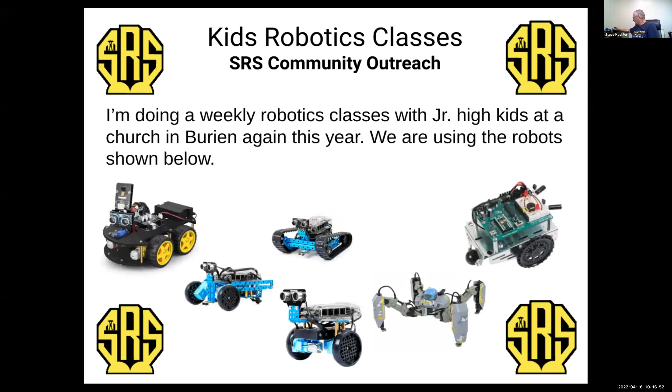I am still in the middle of doing robotics classes with some junior high kids, and currently using, well, I've actually used all of these robots on screen here, but I'm currently using the 3 blue ones in the middle, which are 3 configurations of the same kit. So I actually have, that's what these guys back here are. I'll show those off a little bit later.

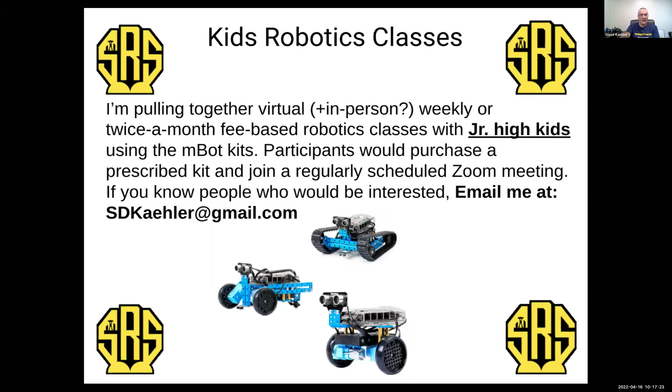I'm still working on it. I've purchased StephenKaehler.com, so I'm creating my own website where I'm planning to have online classes for junior high kids, or kids in that age bracket, doing some sort of robotics thing, possibly using these kits or maybe something else. There's some definite advantages to these, so I'm hoping to share that with you later.

Drive Electric Earth Day is this month, and it's basically filled with events. Most of them are in other parts of the country, but there's an event happening next weekend up in Mill Creek, and another event down in Olympia the last Saturday of the month. I'll be gone for the one next week, but I'm planning to be down at the one in Olympia with my Nissan Leaf.

First Washington events. First Washington is in full swing right now, so there are competitions happening, with some of the preliminary elimination rounds as the kids work towards the finals. You can visit the SRS website, click on First Washington up at the top, and find out about that. Encourage support for that.

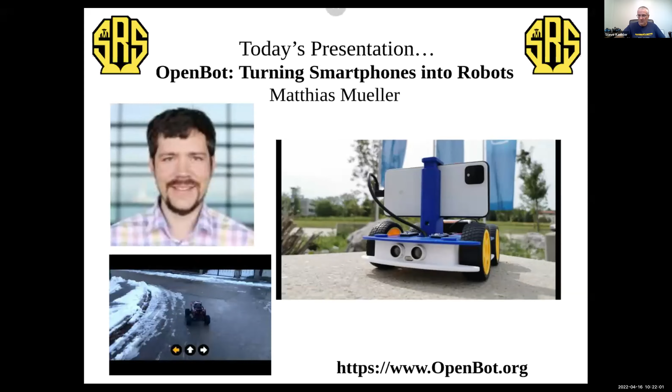Let's see, I should have checked while I was just looking there to see if Donna is here. I know Lloyd is not here today.

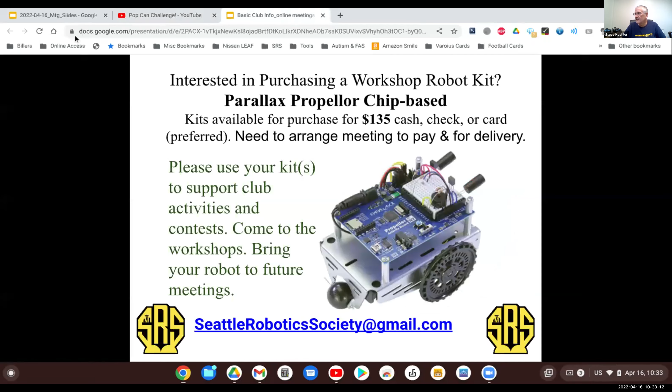Let's see, whoops, get to the right slide deck. So anyway, sorry about that. I had to show that because it was like a promo for the pop can challenge here.

How you doing there, Greg? You close? Just a second, okay, talk amongst yourselves. All right, let's see here, if I can, what I'm hoping... find the speaker. Let's see, select a speaker. Leave computer audio. Oh let's see, what, I'm gonna just check something here quick. Oh that, oh okay, that's all that is. All right, really, what the heck? All right, let me see here, try another one here.

Come on. All right, let me see here. Is anybody, let's see, are you hearing anything from that? No? It's not making any noise on my end either. That's kind of interesting, I wonder what the...

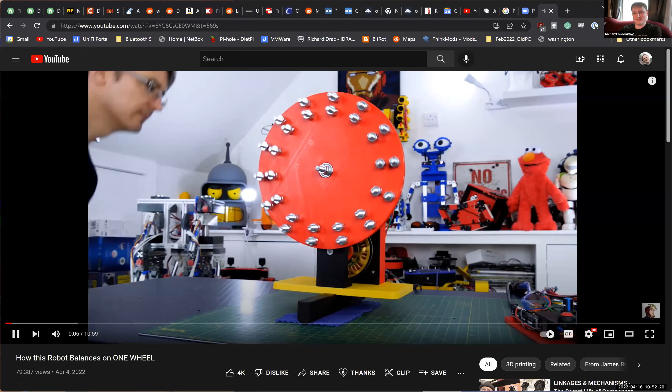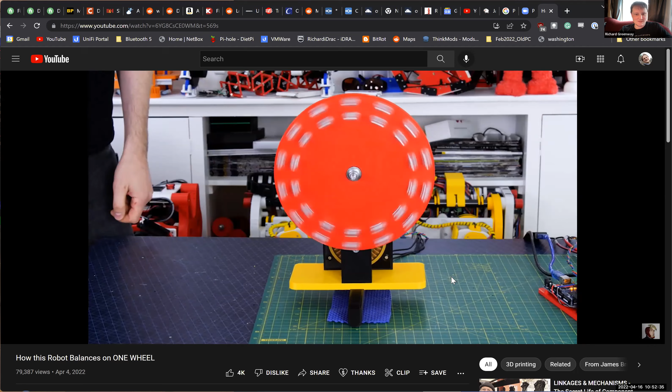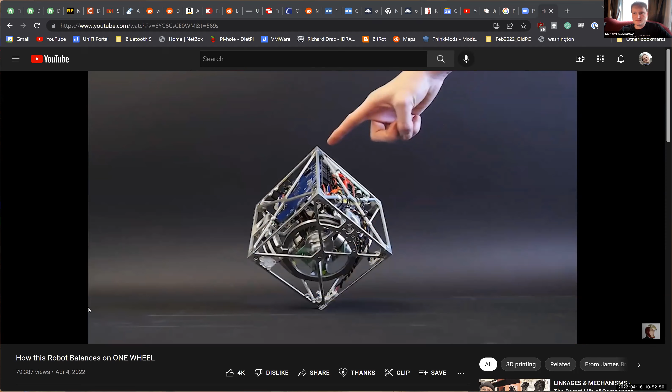Let's see if I... I also got one that we can share. That one is really cool. I love it.

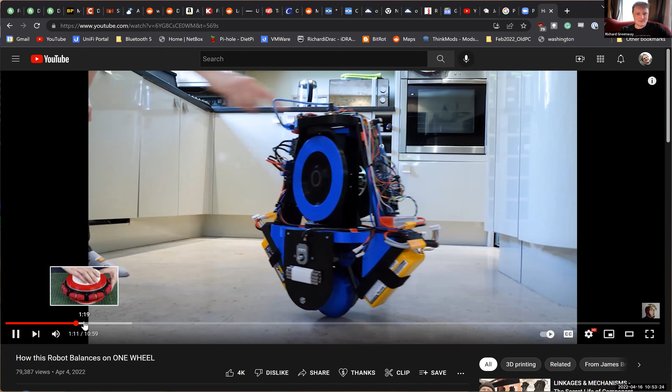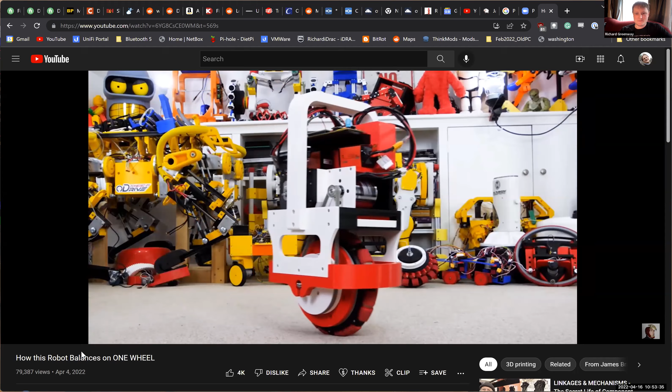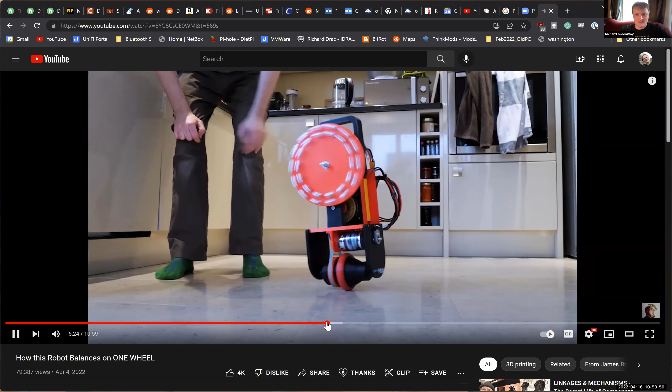So it looks like a lot of these are using the gyroscopic effect for balance. Yeah, and this is actually - we're going to jump ahead here past all this - a reaction wheel, to adjust the reaction wheel, past the JLCPCB ad.

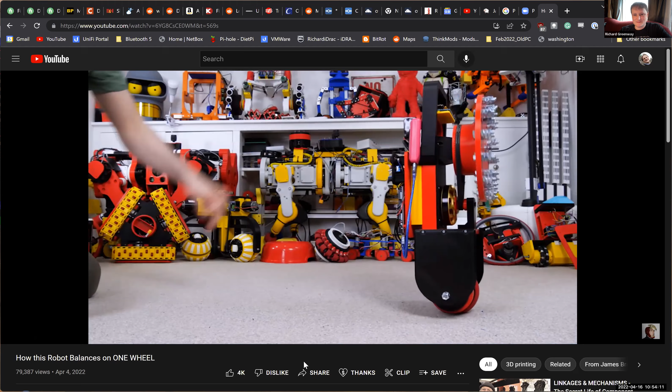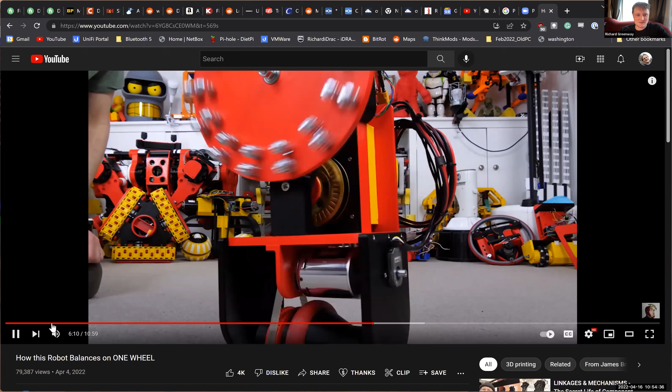So I believe he's programmed this thing so that you suddenly accelerate in one direction or another to give a rotational force on the robot, and then slowly slow down in such a way that you can maintain your position without having your reaction wheel spinning at a high speed, so you can use it again. But if you don't do that, you get to the maximum speed of your motor and then you can't control it anymore. Yeah, that happens too.

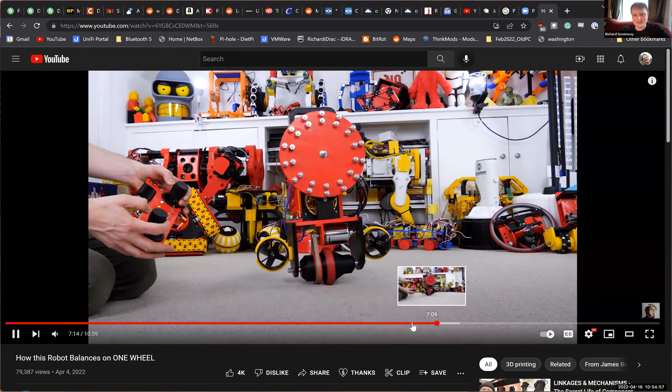Oh, that's really clever. But that last one is an omni wheel that has powered wheelets, right? Oh, really? So it doesn't have any reaction wheels or gyros, it just has a two-directional omni wheel.

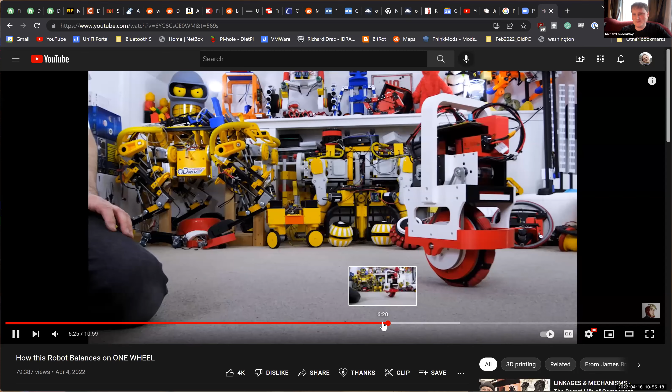See the little wheelets? He went through two versions of this to come up with the good one. And there are little gears in there that drive all those wheelets. So they're driven from the axle - the axle on one side drives the whole wheel, and the axle on the other side drives the wheelets. Wow.

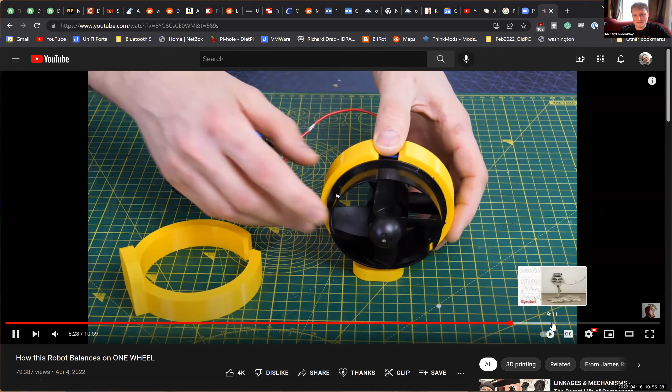So he makes all sorts of 3D printed robots, this guy. Yeah, oh yeah, amazingly productive. And he has sponsors that are 3D printer companies and JLC filament PCB companies, etc.

I've seen other stuff - I'll drop the link to his channel in the chat here for you guys. Yeah, he did. I watched a YouTube video about a BB-8 robot that he took apart, kind of figuring out how this thing worked, and then of course wanted to go at it with his own ideas and improve upon the original design. It was kind of interesting.

That was like 6 years ago. Cool. Yeah, I just looked at that channel. Yeah, right.

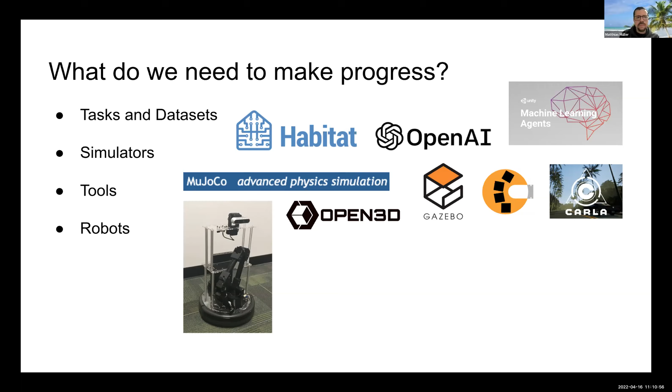I'll just briefly talk about some things going on in our larger group. One project, for example, is Open3D—it's also an open source tool for 3D data processing. If you're interested, feel free to have a look at that, and feel free to ping me if you have any questions.

Another big open source tool that came out of our group is CARLA. It's a very photorealistic simulator for autonomous driving, and we're actually working on an indoor variant that can also be used with OpenBot. Again, if you're interested, feel free to check out the open source CARLA project and play around with the simulator.

One more thing I quickly want to mention, and especially in this audience this would be quite interesting: we have quite a lot of research going on with real robots in collaboration with universities, for example with ETH Zurich and Marco Hutter's group. The top one is where we learn from data very robust policies that can control these quadruped robots to go into really rough terrains. And at the bottom, we also trained policies that can fly these high-speed drones and perform very acrobatic maneuvers.

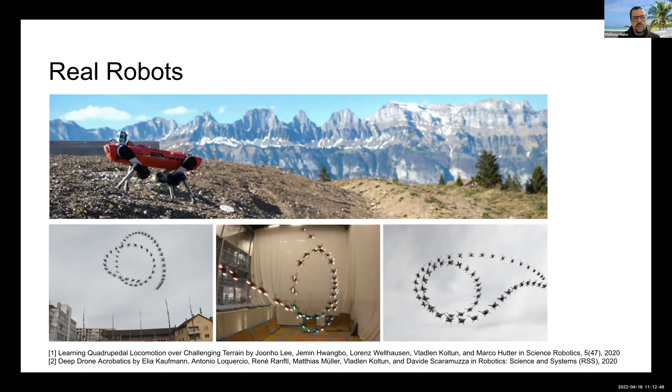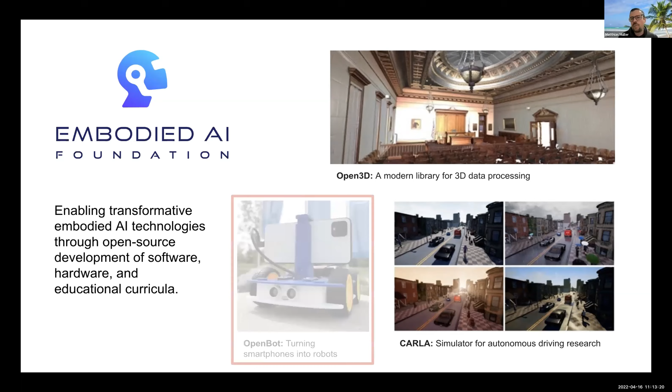Maybe one more thing to mention is the Embodied AI Foundation, which houses some of these open source projects that come out of our group. The idea is to grow these projects, make them more mature, and make sure they stay completely open. I briefly mentioned Open3D and CARLA, and now there's also OpenBot, which I'll focus on for the next couple of slides.

The idea of OpenBot is this: we've had a couple of previous successful open source projects and exciting research, but most of this isn't really accessible for most people. For the drone and quadruped examples, these are extremely complex systems that require a complete robotics lab with 4 or 5 hardware experts to build a software stack, plus cutting-edge research to make these systems do something interesting.

The vision behind OpenBot is to have a low-cost, accessible platform that can be used by anyone, using smartphones to run AI algorithms to make these technologies accessible for education, research, and so forth.

I'll briefly mention this at the very end: beyond education and making research accessible, there's additional benefit in having such a low-cost plug-and-play platform—scalability. Since these robots are extremely cheap and can be operated with a smartphone, it's much easier to scale such a system up to hundreds or thousands of robots and do distributed learning than with currently existing robots.

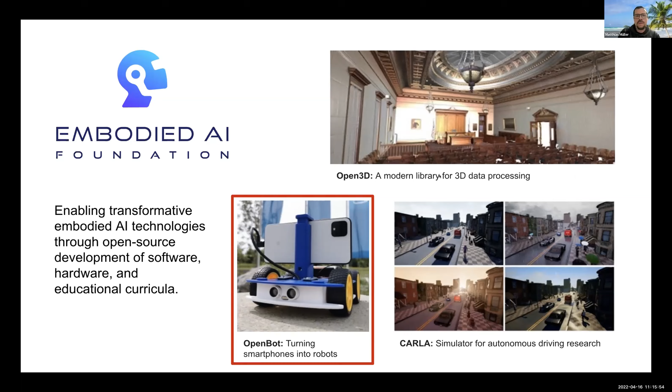Okay, let me expand a little on the motivations behind the OpenBot stack. A lot of current robots are quite expensive or have limited capabilities—you usually have to make a trade-off. You can get low-cost robots for $50 to $100, but usually they can't do a whole lot, or you need to shell out $500 or beyond to get capable robots. Also, hardware is usually quickly outdated.

Camera technology gets updated quickly, the same with compute. Setting up and operating is oftentimes not straightforward. For very simple tasks, maybe you can get away with just Arduino or simple Python programming, but for more sophisticated tasks you often need to master multiple tools, maybe even ROS. As a result, robotics education still lacks exposure to AI algorithms, and a lot of it is limited to simple tasks like line following or basic obstacle avoidance with a sonar sensor.

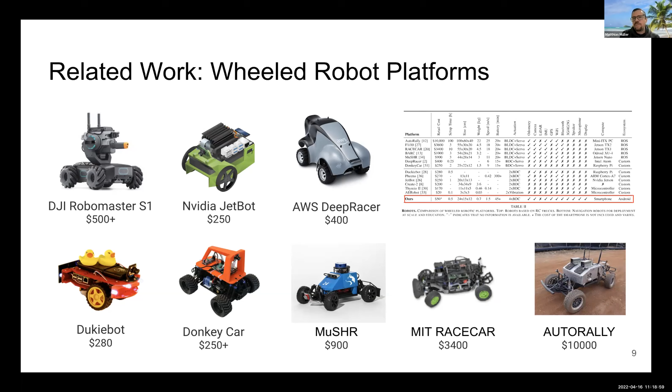The idea is to leverage a smartphone for sensing and compute. Smartphones become more capable pretty much every day with new releases—many already have 2, 3, or 4 camera sensors, very good IMUs, and so forth. They're also powerful enough to run heavy-duty AI algorithms, which if you bought a computer to do that, you'd be looking at $200-300. Current smartphones go way beyond something like a Raspberry Pi in terms of compute.

So the idea is to take the robotics part out and have this $50 robot—a fairly simple Arduino-based robot with a 3D printed chassis—that has an interface for you to just plug in a smartphone, which runs all the heavy-duty compute and takes care of the majority of sensing, specifically cameras and IMUs. The other nice thing about a smartphone is that all the sensor data, like IMU and camera, is already synchronized on the device.

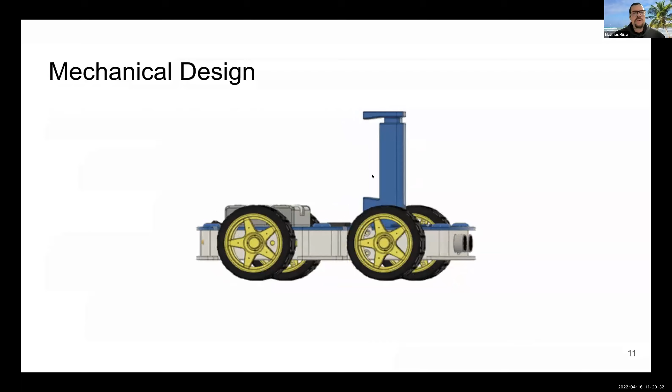So we have developed a simple mechanical design that you can just 3D print, and that relies on standard components like TT motors, Arduino, and so on, that you can get pretty much anywhere off the shelf.

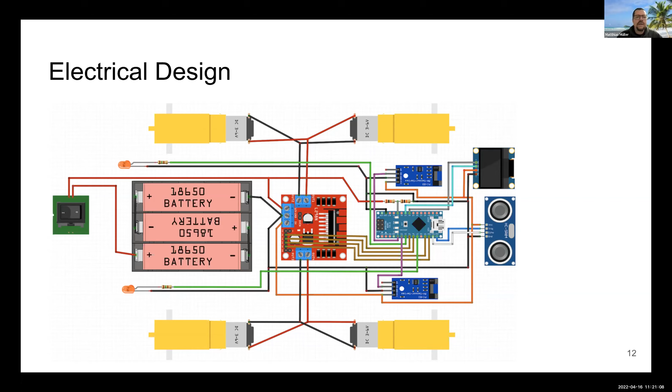To make things even easier and more accessible, we also designed a simple PCB that integrates as much as possible - basically the motor drivers and some resistors for indicator LEDs and stuff like this. It has a header for an Arduino, so you can get these PCBs made for like $5 or so, then you just plug in an Arduino, connect a couple of sensors, and you're basically done. You can then connect the phone via USB, and you have a fully functioning robot.

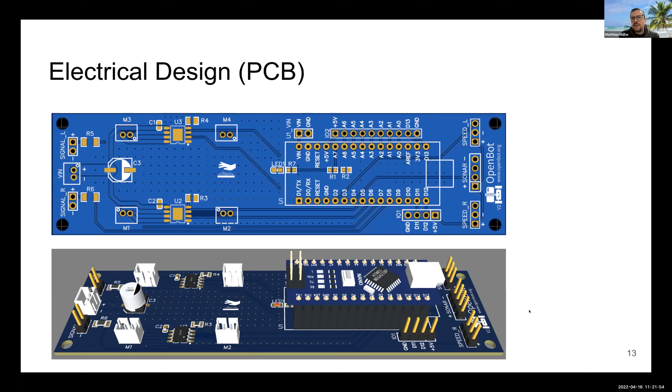So maybe, are there any questions at this point, more on the robotics part?

I just have a real simple question. This looks very similar to a kit I used with some kids. Those motors - I assume the little yellow part is just the gearbox on a standard permanent magnet DC motor? It's very simple, no encoder. These are just standard, I guess they're called TT motors - a simple motor with a little plastic gearbox in the front.

So this is just one possible design that's 3D printed, but you can use any design you want. On the GitHub repository we provide firmware for the Arduino and the Android apps, so there's no requirement to use that particular design. You can just buy any kit or build whatever you want, and then use the firmware and the software.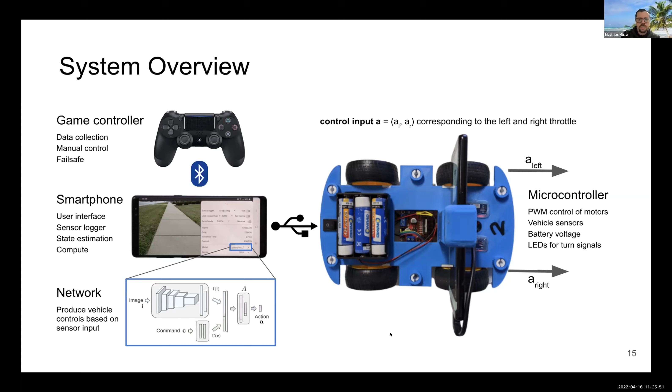For the software side, on the Android side you have an interface that can accept various controllers - Xbox, PS4, basically any Bluetooth controller you can connect to the phone. This gets parsed within the app into vehicle control and indicator commands. There are a couple of different modes of controlling it - either tank-style dual drive configuration, or more like a video game mode. There's also a graphical user interface with a couple of different screens for different functionalities, plus some audio feedback and so on.

There's also simple state estimation. For now it's very basic, but in principle you could also use ARCore. That's one research project we're doing - using ARCore you can essentially localize yourself within a space.

We also have a data logger that allows you to capture images, IMU, GPS, synchronized with controls and indicators on the vehicle. This is used for training some driving policy to do some sort of autonomous driving.

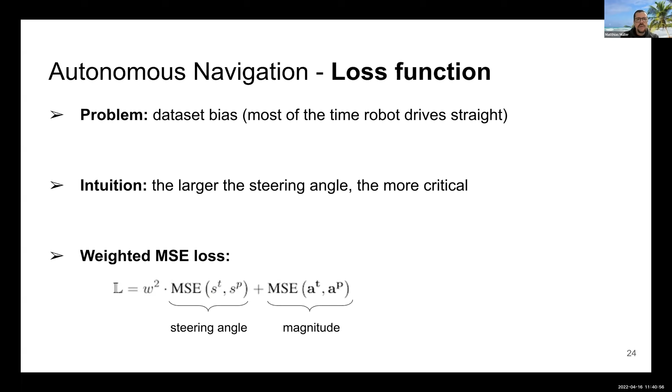And then for testing, we defined some fixed trajectories like right left turn, closed left turn, double straight, open right, and then we evaluated basically all the different phones and robots on these specific scenarios.

We also found that if we train policies with one robot body that has certain characteristics, like for example veers to the right, they tend to transfer also to other robot bodies that have different characteristics. Most likely the reason for this is that by injecting this noise and doing these perturbations, the driving policy is able to learn how to recover, even if the robot is doing something unexpected.

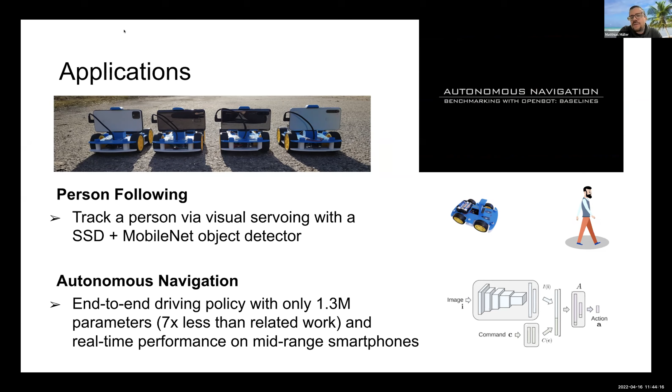Is it just using visual data for the distance between her and the robot, purely sizing her up to decide? It's actually completely reactive, so it doesn't really take the distance into account. It just detects the person, and then it always goes forward and then left and right based on where the person is in the image.

So very, very simple. If she stopped moving occasionally, does the robot figure that out and just stop and wait for her to start moving again? Yeah, there is also the sonar sensor, you can specify a threshold. I think by default, if the person is within 10 centimeters, it'll stop, and it will only start applying controls again once that distance is more than 10 centimeters. But that's something that can be configured in the firmware.

There's a couple questions in the chat here. One of them is about iPhone support—is there an app that runs on iPhone? No, not yet. At the moment it's only Android.

We are quite interested to also develop an iOS app, but it's quite a lot of work, and this project is basically run by the Embodied AI Foundation, which is a non-profit organization. I still contribute a bit to it, but it's not really part of my main work. So if there's interest, or if you know a good iOS developer, feel free to forward them to me, and I can talk to the foundation and see if they can pay someone to actually do the work.

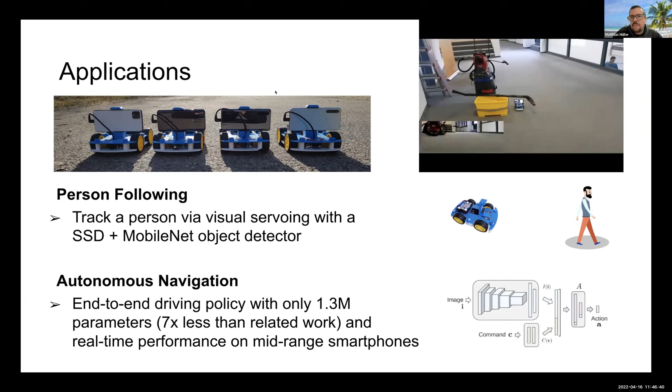Yeah, and then here, this is kind of the autonomous driving stuff. You can see it driving around autonomously in the office corridors, able to avoid chairs, people, flower pots. And then we also put it up on a different floor, so it looks somehow similar, but it's an environment the robot has never seen. You can see here there's this wide open corridor, which is something it has never seen, and it's able to generalize to that and still drive along, which is quite exciting, and I didn't really expect that, to be honest.

All right, are there any other, does it have boyfriend detection? Yeah, not yet, but it's something you could implement. You could collect a data set from your boyfriend or girlfriend, annotate it, and then train a model that can detect them. Yeah, boyfriend avoidance is also, maybe you could even implement it to shoot like with a Nerf gun at the boyfriend. I mean, who knows? Lots of possibilities.

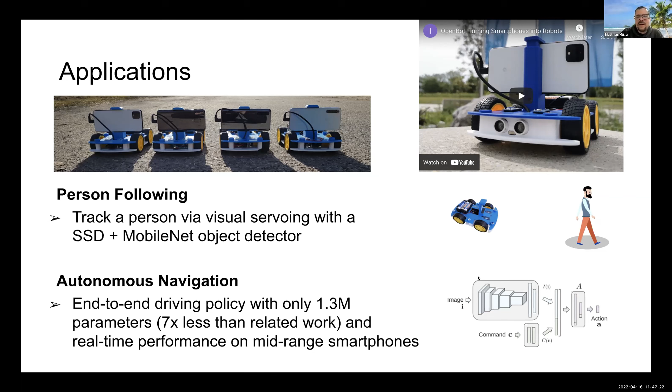All right, so then let me move on. I'm going to move a little bit to a couple of applications. So one is education. This platform has been used now already by more than 100 students that have learned about AI and robotics using it.

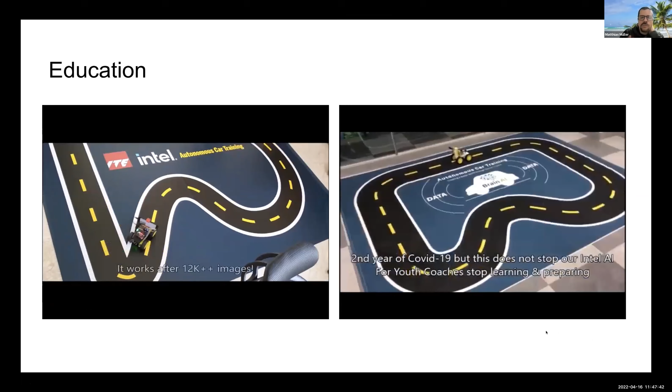So one standard task is to print out this little street, and then the students will first build their own robots. Then they'll drive around the track for like 20 minutes, collect some data, and then train an AI policy that will autonomously drive around this track based only on observations from the camera on the phone. And this is actually done - this was done in Singapore, South Korea, and also Germany, with just $50 smartphones. So basically the complete setup is only $100, about $50 for the robot and $50 for a smartphone.

Yeah, so you can see also if you position it somewhere along the track, the robot will automatically find the street again, and then kind of keep driving along the street. Yeah, so that's education. And then, yeah, ongoing work.

So I already briefly mentioned, there is quite a big community around this kind of initial project now. And focus areas are software development, extending the Android app. There's actually two - it's also possible to control the robot with a second smartphone. Continuing the development of the Python interface, web interface, and so on.

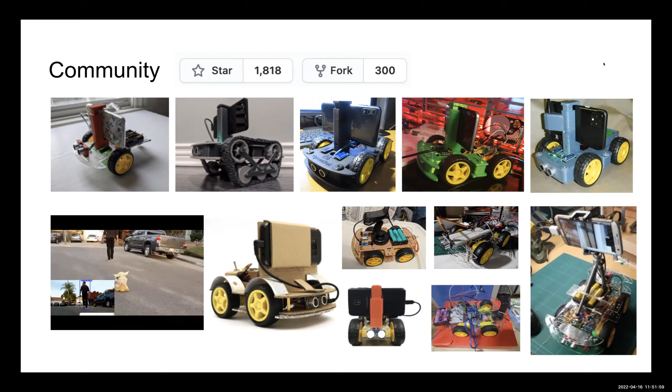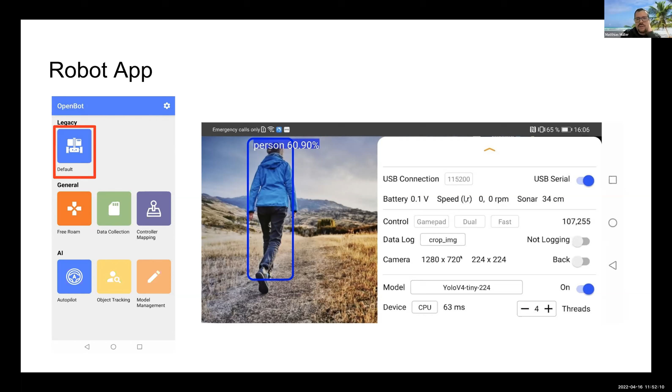For the robot app, since the initial inception, we've made it nicer and more extendable, so there are quite a lot of different screens now. This is the one we had initially that has all of the functionalities in one screen, but now we have this free roam screen that looks a little nicer and shows you the most important data for just driving around.

There's a dedicated data collection screen that also allows you to connect to a web server that will automatically receive all of the data that you collect.

This is just, if you connect a Bluetooth controller, you can check that everything works as expected. There's also a dedicated screen for running the autopilot and object tracking.

Here you can also select different objects. There are about 80 different object classes, including things like water bottles, cars, bikes, motorbikes, all kinds of things.

There's also a model management screen where you can download different models for object detection. We have about 6 now. There are some trade-offs — some run faster but have lower performance tracking objects, while others are slower but perform better. So based on your smartphone, you can pick the model that works best.

Now there's also a dedicated controller app. In case you don't have a Bluetooth controller lying around but have a second smartphone, you could install this controller app and then connect and remote drive the car through that app.

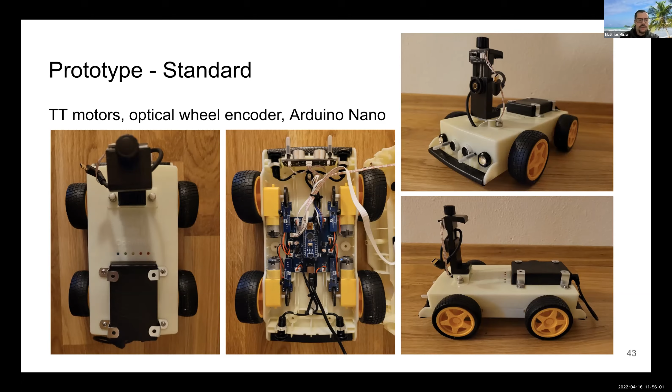We've also now built injection molds, and we plan to sell them through the Embodied AI Foundation. Again, another step to make this more accessible, so people that don't have a 3D printer or the skills to build a robot themselves can just buy them in a shop.

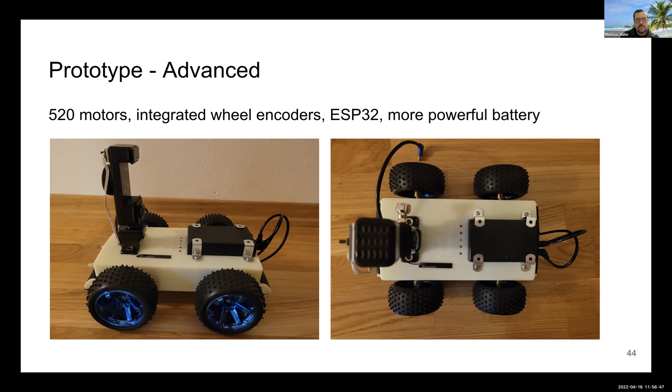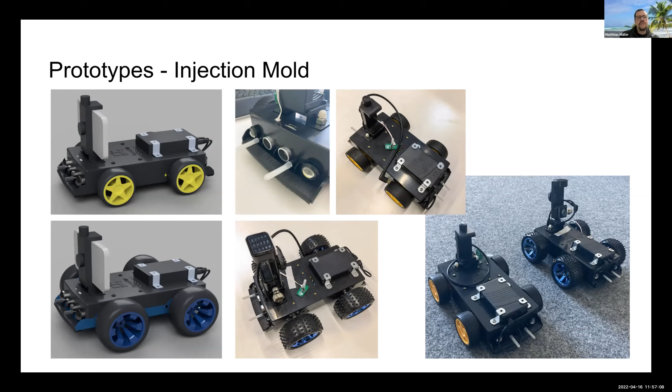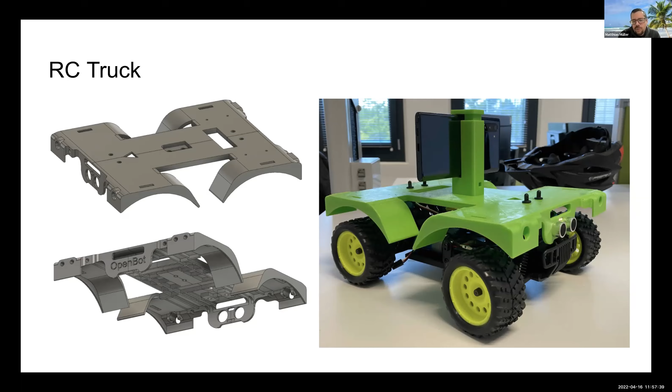Also in the repository, we've put some instructions and made some 3D printed designs for retrofitting RC trucks. With an Arduino, it's very easy to send the correct PWM signals to essentially any RC truck. Then you just connect the smartphone, and you can now do autonomous driving, object following, all of that stuff with the RC truck.

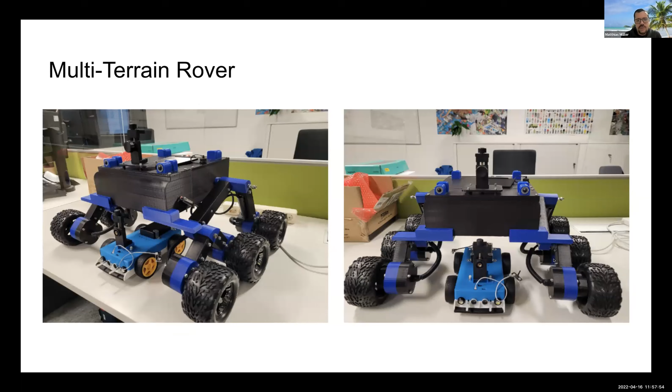Another cool project is the multi-terrain rover. In a couple of weeks, we'll open source all of the designs for that as well. This one is able to climb stairs and go through pretty rough terrain.

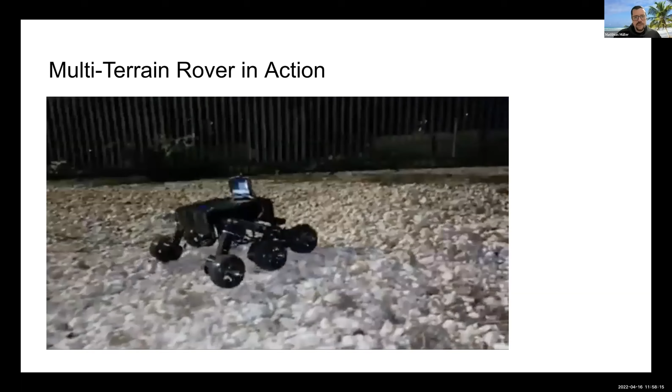Let me show you a little video of it, I think it'll make things more clear. Here you can see it driving around through grass, through gravel — it's pretty rugged and fun. And here it's able to drive up some stairs.

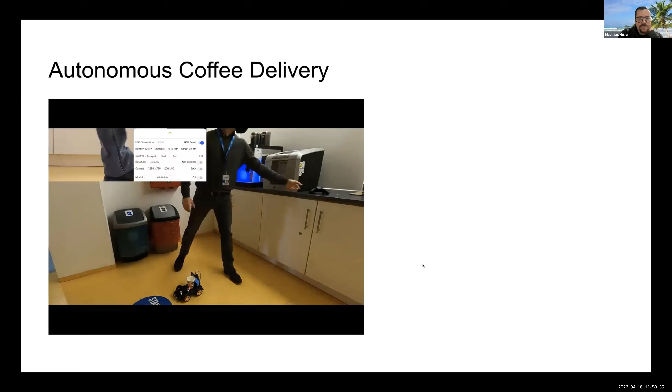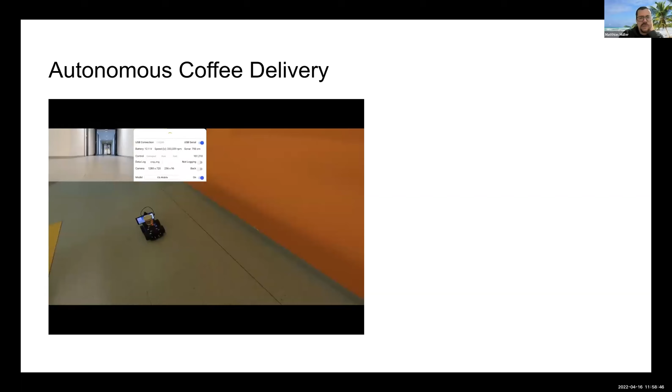Here's a fun thing we did with one of the robots: autonomous coffee delivery. We use the same framework as for driving around the corridors, but now we collect data of the robot going to the coffee machine. Then you just press a button and it will autonomously drive to my office and bring me coffee. In a month or so we plan to release a couple more videos.

The goal is really to inspire the community to try out stuff and do cool things. Let me skip forward a bit, but it'll basically just drive here, turn around, and then go around the corner and bring me the coffee.

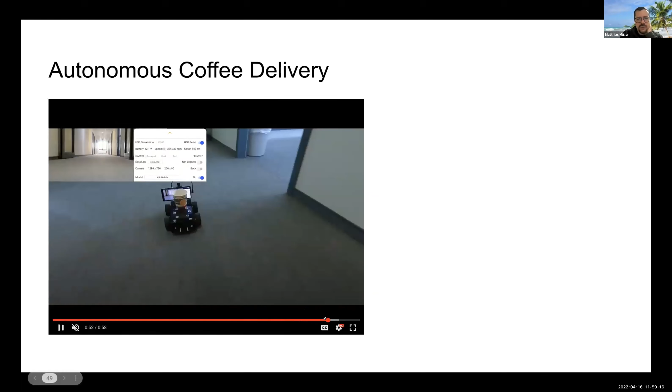I like the turn signals. Nice touch, nice touch.

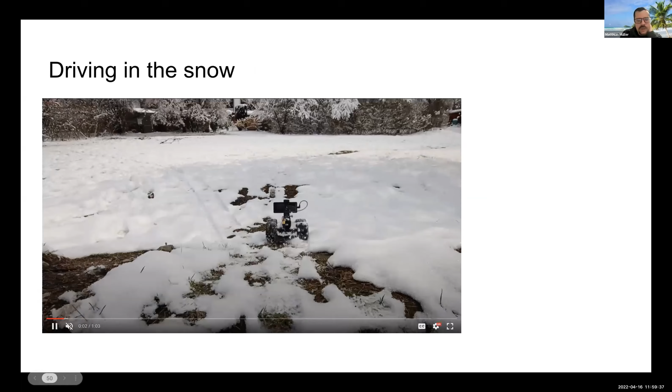Just recently in April it actually snowed, so I beefed up one of the robots with a 4S LiPo and bigger tires, and was racing it through the snow. This is just to give you some impressions. As I said, the robotic platform itself is very flexible—you can take any robot you want and just use the system.

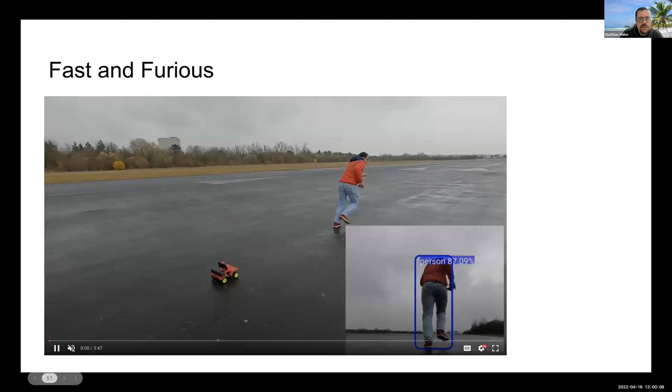Let me show one or two more videos and then I think we're out of time. Here, this is the Fast and the Furious: an RC truck with person following, and I'm running. After about 20 seconds I'm out of breath and the robot runs into me.

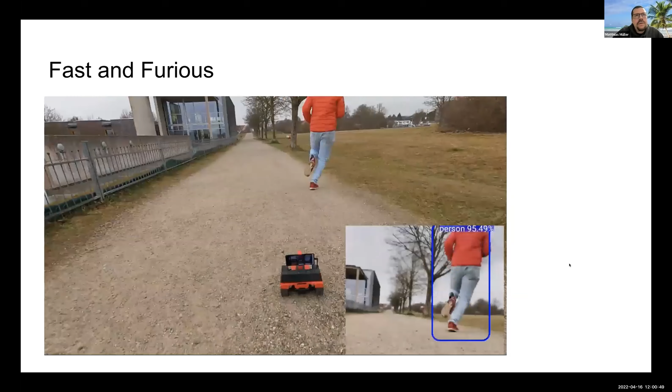So it's also fun as a fitness coach—you just equip the RC truck with person following and have it chase you. I can share these videos later since the internet connection may not show them well, but the point is that with RC trucks, it'll probably go at 20 miles an hour or so, and the person tracking is still good enough that it'll follow you around pretty reliably.

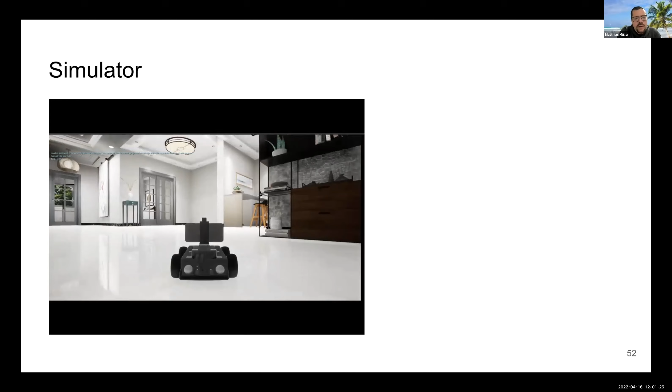Let me give you a quick impression of the simulator we'll release in a couple of months. It's a photorealistic indoor simulator that can be used—at least our vision from a research point of view—to use photorealistic simulators of indoor environments to train policies for autonomous driving in home environments that can then transfer to the real robots.

Last but not least, another research thing we're interested in is distributed learning. We've already built a system we're currently trying out, where the idea is you have a large number of crowd workers, in the range of 100 or beyond, with little robots driving around in their homes. These robots upload their experience to a database, and based on all of this experience we learn some autonomous driving behavior and push this policy back to all of these 100 robots, and they learn more. Over time they will basically improve.

So that's it, and I'm happy to take any more questions if there are any.

Can you send me a copy of your presentation? Yeah, I can do that. I'm not sure if I can do it right now, but when I'm back from Greece and have a good connection. No rush on that, just at your convenience.